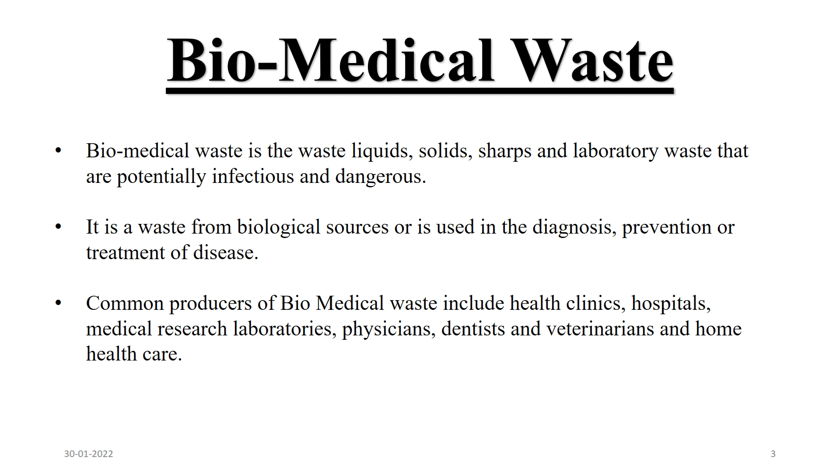Types of biomedical waste: medical waste is mainly categorized into two parts, non-hazardous and hazardous. Hazardous waste includes pathological waste, infectious waste, and chemical waste. Hazardous waste are those that may contain toxic substances generated from industrial, hospitals, and some type of household waste. These wastes could be corrosive, inflammable, explosive, or react when exposed to other materials.

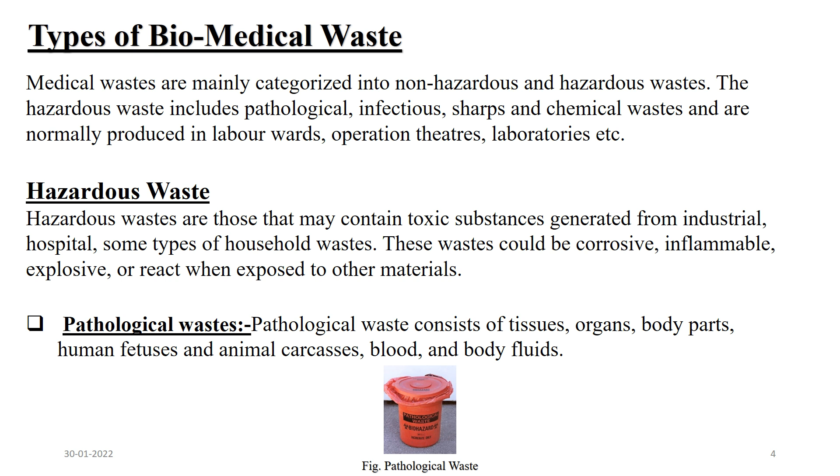Pathological waste consists of tissues, organs, blood, and body fluids. Infectious waste is waste contaminated with blood and other bodily fluids. Chemical waste is chemical or pharmaceutical drugs utilized in clinical areas that are hazardous and require more stringent disposal.

Sources and data: medical waste arises from various activities. These include general medical treatment, clinical investigation, food preparations, and ward activities. The quantities of medical waste generated, among other factors, depend on the status of the hospital, level of instrumentation, and sometimes location of medical facilities.

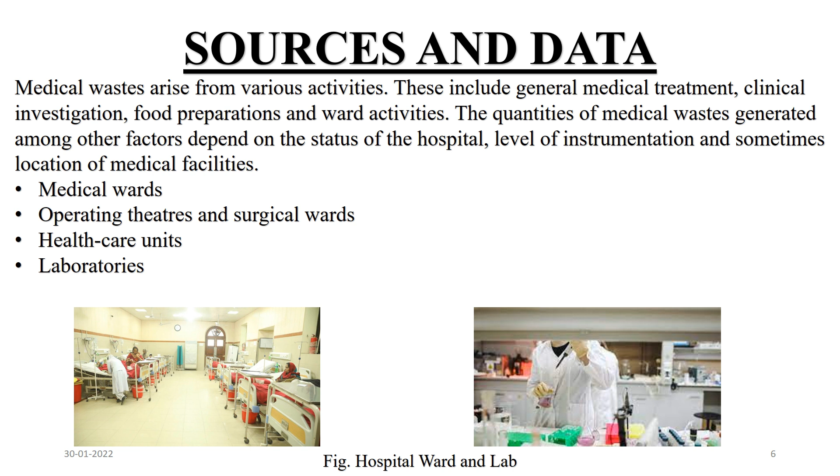Medical wards, operating theatres and surgical wards, healthcare units, laboratories. According to the Central Pollution Control Board annual report of 2016, the total quantity of biomedical waste generation in the country is approximately 517 tons per day. India generated over 18,000 tons of COVID-19 related biomedical waste in only 4 months.

Now, segregation of biomedical waste. In table number 1, it is a chart for segregation. It includes yellow dustbin, red dustbin, white dustbin, and blue dustbin.

In yellow dustbin: pathological cotton waste, beddings, face mask. These types of wastes are thrown in yellow dustbin. Red dustbin includes syringe without needles, IV set, gloves, dialysis kit, IV bottles, goggles. White dustbin includes needles, syringe, blades, etc.

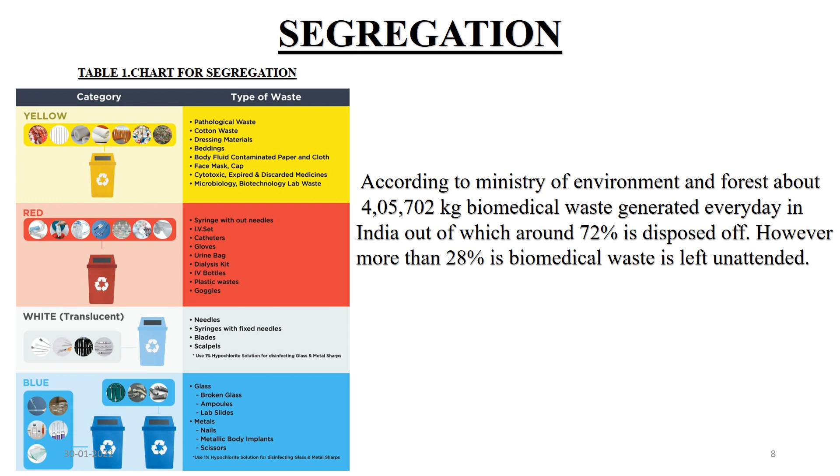Now, biomedical waste used in construction industry. Researches are being carried out to develop suitable alternatives to construction material. New materials are being used to replace the old ones, improve the durability, strength, aesthetics, and economy. Biomedical waste ash is majorly used in two places: concrete manufacturing and road construction.

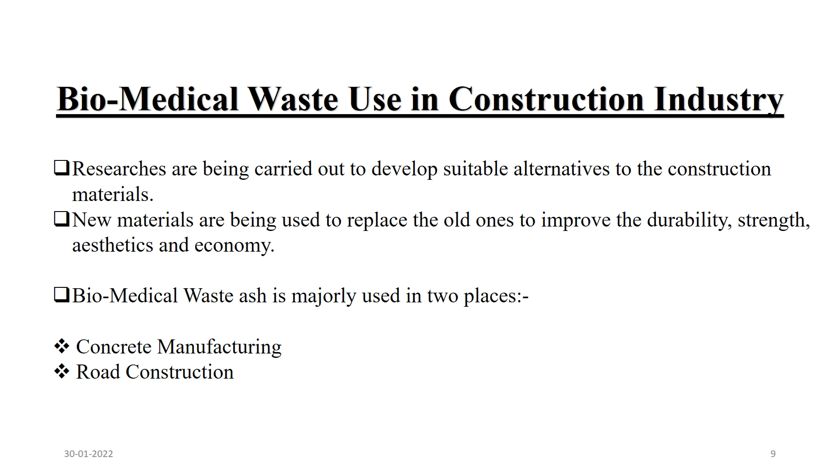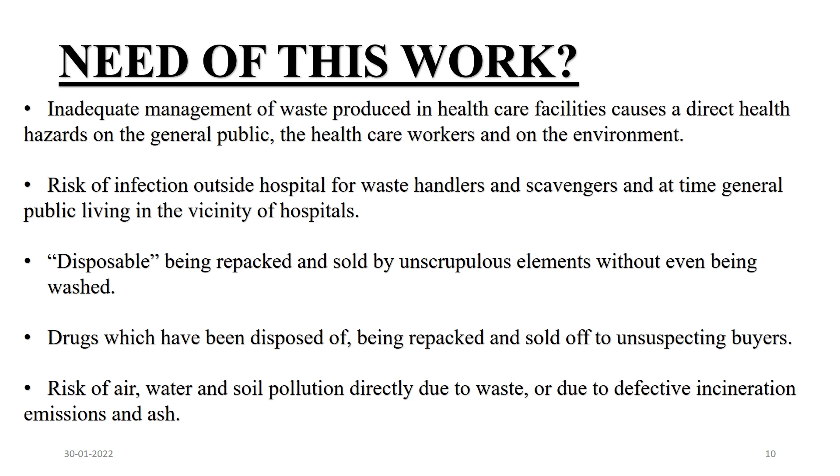Why do we need this work? Inadequate management of waste produced in healthcare facilities causes direct health hazards to the general public, healthcare workers, and the environment. There is risk of infection outside hospitals for waste handlers and scavengers, and at times general public living in the vicinity of hospitals. Drugs which have been disposed of being repacked and sold off to unsuspecting buyers. There is also risk of air, water, and soil pollution directly due to the waste or due to defective incineration, emission, and ash.

Now, use of biomedical waste in concrete manufacturing. From research paper ISSN 2321-0869, in which tests were performed by Udit Kumar, Vikas Srivastava, and Amit Kumar Singh, they tested the workability of concrete using biomedical waste.

Workability: the concrete which can be placed and compacted easily without any segregation is known as workability. Now, table number 2: it is evident from the table that workability of concrete decreased with increase in replacement level. This may be due to the reason that, being lighter than cement, biomedical waste ash occupies more volume than cement on an equal weight basis, resulting in more water being needed for lubrication, which decreases workability.

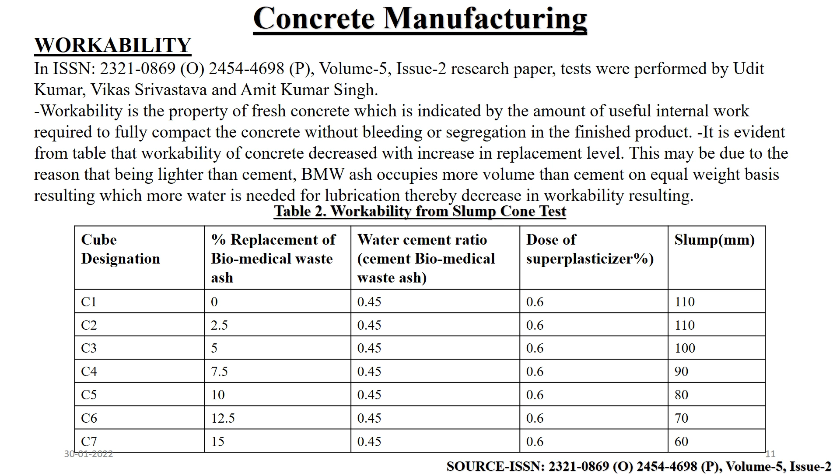Compressive strength is the maximum compressive stress that, under a gradually applied load, a given solid material can sustain without fracture. It is calculated by dividing the maximum load by the cross-sectional area of a specimen in a compression test.

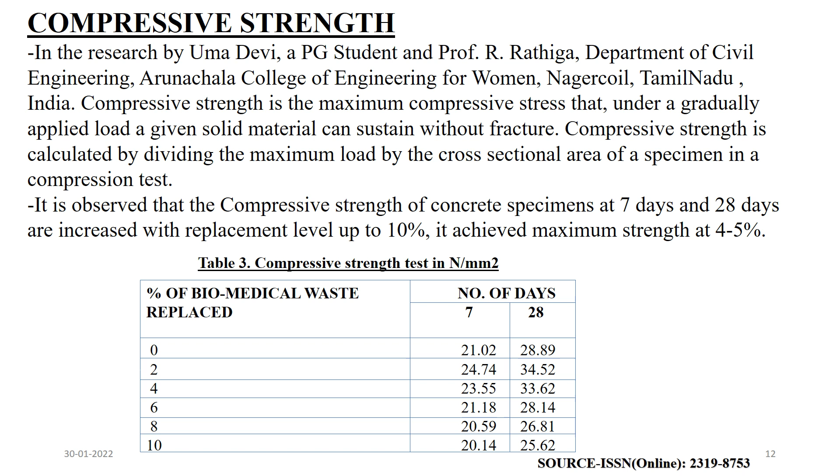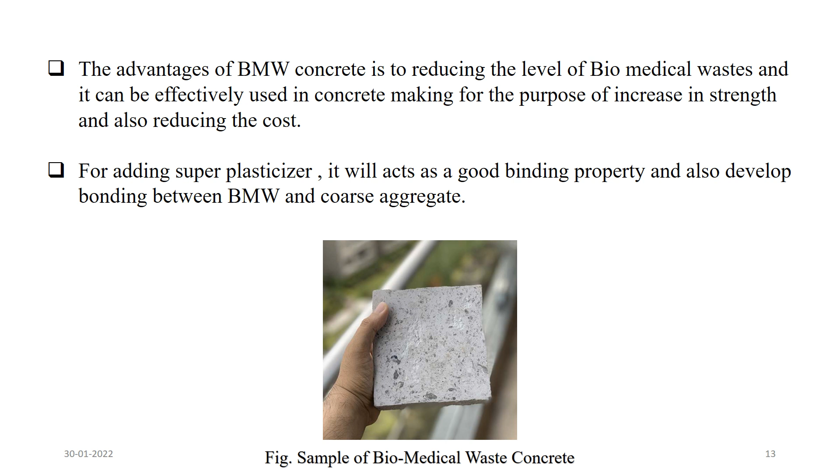The advantages of biomedical waste concrete are reducing the level of biomedical waste, and it can be effectively used in concrete making for increasing strength and also reducing cost. Adding superplasticizer acts as a good binding agent and also develops bonding between biomedical waste and coarse aggregate.

Here are the benefits of using biomedical waste in construction and places where it is used. Dera Bassi in Punjab is implementing the use of biomedical waste ash in construction.

Second, Zerund concrete bricks, a startup by Rupam Choudhury, David Pratim Gogoi and Mousum Talukdar, guided by IIM Calcutta. Zerund replaces red brick with fly ash, biomedical waste ash and plastic brick, reducing construction time by 25%. This brick has thermal and sound insulation, and is earthquake and fire resistant.

This means the Zerund concrete bricks are more usable, and the strength of Zerund concrete bricks is more than normal red brick. The weight of a Zerund concrete brick is 8 kg, and its strength is 4 to 5 megapascals.

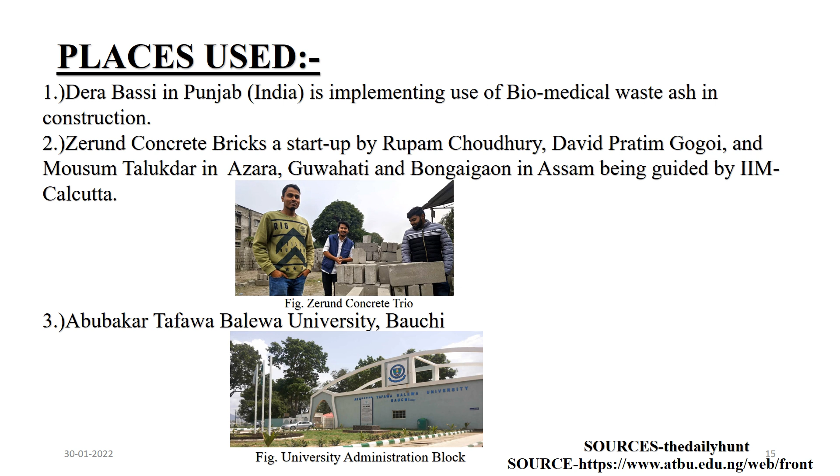Third, biomedical waste is used in construction at Abubakar Tafawa Balewa University in Bauchi. Now, use of plastics and biomedical waste in construction.

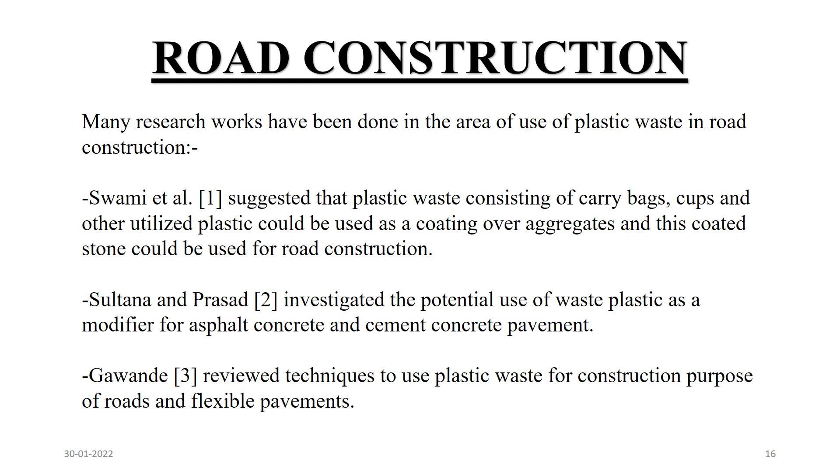Road construction: use of plastic waste in road construction. Swami suggested that plastic waste consisting of carry bags, cups and other utilized plastic could be used as a coating over aggregates, and this coated stone could be used for road construction. Sultana and Prasad investigated the potential use of waste plastic as a modifier for asphalt concrete and cement concrete pavement. Gawande reviewed techniques to use plastic waste for construction of roads and flexible pavements.

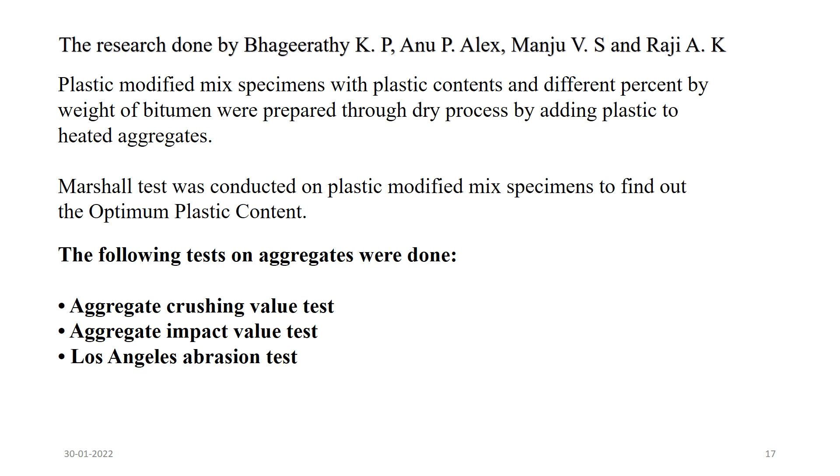Research done by Bhageerathy involved plastic modified mix specimens with plastic contents at different percentages by weight of bitumen, prepared through a dry process by adding plastic to heated aggregates. Marshall test was conducted on the plastic modified mix specimen to find the optimum plastic content. The following tests on aggregate were done: aggregate crushing value test, aggregate impact value test, and Los Angeles abrasion test.

The following conclusions are drawn from the study. Marshall stability value of the plastic modified mix was found to be 51% more than that for the normal mix, indicating an increase in load carrying capacity. Aggregate impact value showed a percentage reduction of 17.7 on coating, meaning plastic coated aggregates have better impact resistance. The permanent strain was reduced by 0.21% for the plastic modified mix. Average tensile stiffness modulus value of the plastic modified mix was found to increase by 47.8% over the normal mix, indicating an increase in tensile strength.